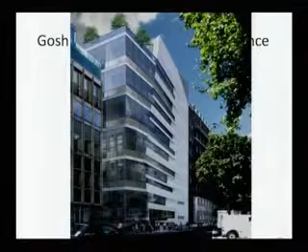This is one of our projects, the extension to the Great Ormond Street Hospital in London. It's under construction now and will be finished by the end of this year, and has a flue wall in the corner there. Oh, you can't see the words, but it's rated BREEAM 77%.

Now, does that make it a green building? The highest you can get in BREEAM in the UK is 85 points. So with 8 more points, it would become the greenest hospital in the UK, or the greenest building in the UK. At the moment, at 77 points, it is the greenest hospital. So I believe we need to go beyond this—beyond accreditation, and beyond engineering.

I'm going to present a number of ideas today about green design. The first one is the idea of vertical urbanism. Most skyscrapers today are like this image you see on the screen—a stack of concrete plates homogeneously one on top of each other.

Now, why does a tall building have to be like this? Somewhere along the line, some engineer said yes, it'd be easier to stack everything together, have the same floor plate design, and extend it, extrude it all the way up to the sky.

Of course, the same architect, if asked to design a medium-rise or low-rise building, would do something like this—he would have atriums inside, he would have programs inserted into it. So why can't we design a tall building in the same way we design low-rise and medium-rise buildings?

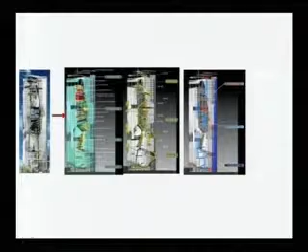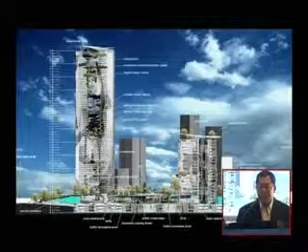That's how we should design our tall buildings: the vertical expression of horizontal desires. So I started to design the skyscraper with different programs in it, with paths in the sky, with various alternative circulation systems. Instead of just one central system, there may be several multiple, so we try to create a city in the sky rather than just a homogeneous stack of plates. This is one of my recent projects in Germany for a vertical city in which the buildings are stacked together in a series of programs in the sky.

So there you are. You have multiple programs, multiple circulation systems. In the last diagram, I indicate that you could even have larger distances between floor to floor, so you can insert secondary floors into it and tertiary floors into it.

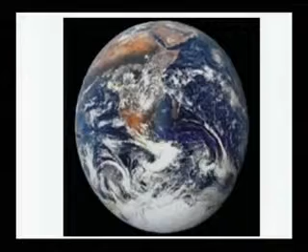The next is the idea of ecological nexus. In nature, everything is connected. It's us human beings that fragment nature. We chop up nature into pieces. We cut, we convert pieces of land by laying out roads and bridges, and we convert the cow into a burger.

The ecologist sees the Earth as covered by this thin film called the biosphere, where living organisms live. Within this biosphere are units in nature called ecological systems. Ecological systems consist of both biotic components as well as abiotic components to make a whole. However, what we've done is design all our buildings synthetically.

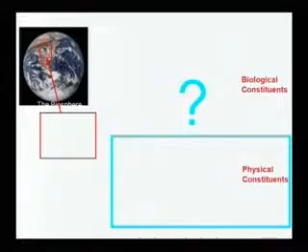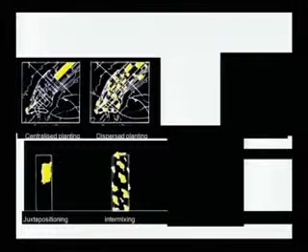If you look at the building like we are in right now, everything in this building is inorganic except human and the bugs. So what we need to do is try and bring back vegetation into nature, into the built environment. Obviously the simplest way is to have sky courts, as you can see in the diagram on the left, or you can have a spotty relationship, as you can see in the one in the middle.

But ideally what you want to do is connect it, because without this connectivity, nature is fragmented, nature is chopped up. So those of you who put sky courts in your buildings, make sure they're connected to the ground, because this is what ecology is about - if it's not connected, then you've quarantined nature.

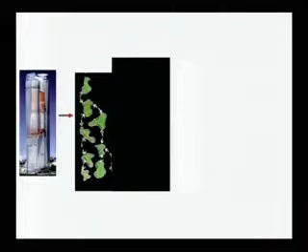So what you want to do is create ecological corridors, or a spiral relationship all the way up to the sky. Of course, there are species in nature that can move from one piece of ground to another, a patch of green to another patch of green, without being connected - species such as birds, insects, and butterflies. But ideally, we need to connect them, make it continuous all the way up to the top of the building.

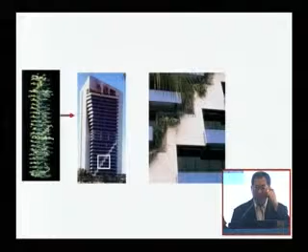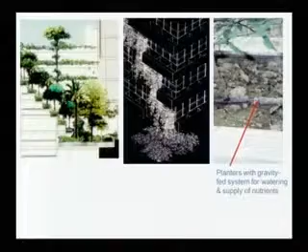This is one of my early projects, a tower for IBM, where here we have a series of step planters going all the way up. The planters have a trellis in between, and this enables continuous vegetation going up to the top of the building.

Another project is this tower, a 40-story tower in Kuala Lumpur, and here we have vegetation on the outside which gives it what I call an indeterminate look. I love this image because this is, for me, what a green architect should be. Green architecture should not look pristine, should not look modernist. It should be like this, it should be fuzzy. And when this was completed, my friends called it the hairiest building in Southeast Asia.

So what we need to do is have this continuous vegetation. This is a scheme that we designed in a cold climate, and the continuous vegetation in the cold climate has to be inside the building. So what we have is an atrium inside, and then the vegetation climbs up to the top of the building.

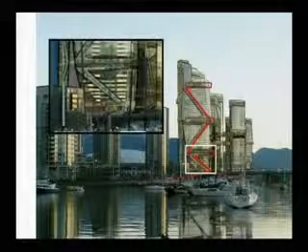Where it hits the edges, it goes into a sky court, also linked by a sky bridge to the upper part of the building. The atriums are recessed into the facade, and they are enclosed to protect the vegetation during the winter months.

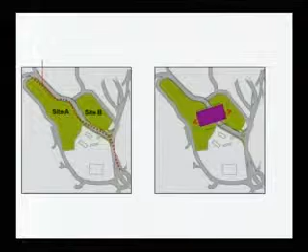The next idea is to see the skyscraper in this way - what I call the eco bridge. Now, if you have two sites which are separated by a nasty highway in between, what happens if you bridge across it? What happens if you vegetate the bridge? Then instantaneously you have created a connected ecosystem.

In which the species are able to migrate from one part of the site to the other part of the site. They're able to interact with each other. It creates a larger habitat with a greater volume of resources for sharing between the species, and then generates a higher level of biodiversity, and being more biodiverse, it is much more stable.

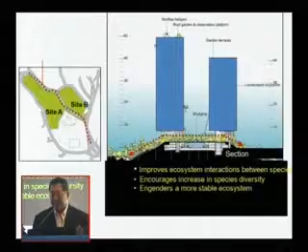With this scheme that we designed, we not only connected the vegetation on the ground plane this way, we brought it across the hinterland through this ecological bridge. So what we've done as human beings is rectify the roads that we built which cut up the landscape—it's now connected, giving us a greater ecological whole.

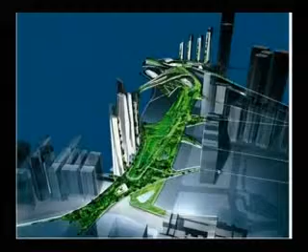The next idea is what I call the eco-cell. That means our connection is not just vertically, but also going down to the ground. This is the master plan for a site where we extended from one part of the site and brought it by a bridge down to the other side.

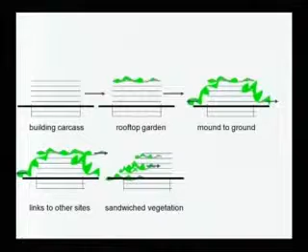Within this master plan, in the podium, the first thing we did was roof the top of the building, bringing the vegetation and biotic components down to the ground to connect to the landscape, tucking it into the floor. But not only that—we cut voids in it so we could bring vegetation, daylight, and sunlight into the bottom of the building. These are where the eco-cells are.

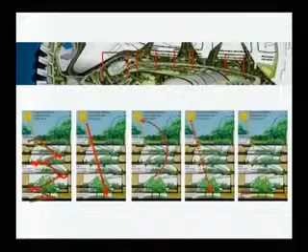Within this eco-cell, you can see it provides opportunities to bring vegetation all the way down to the ground, opportunities to bring daylight to the inner parts of the building, opportunities for natural ventilation, and at the bottom you could have a detention pond, or even a living machine if you wanted to.

Here's an example of an eco-cell we designed in Singapore, viewed from the ground plane—eco-cells on the left-hand side—and this is the view at the basement level. It brings daylight and vegetation into the space. That's the National Library in Singapore, completed a few years ago. In Singapore everything is high-rise, so this is a high-rise library, 120 meters high.

The other idea then is to see the building—oh dear, the slides, the background's gone. Is it? Can you see it? Okay, I hope you can read it.

The idea is to see green design as the integration of four eco-infrastructures: the gray, the blue, the red, and the green. I color-coded it because it makes it easier to communicate the idea of what green architecture and green master planning should be. The gray is eco-engineering.

I specifically kept it general—I didn't want to mention particular technology—but essentially all green architecture has engineering, whether we like it or not. Our quality of life requires engineering to handle all the different aspects of our lifestyles. So all green architecture has this gray infrastructure, which is eco-engineering or clean technology.

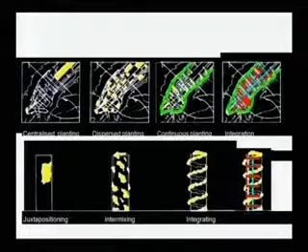Green architecture is the integration of these four infrastructures into a whole. If you take this as a framework for evaluating green design projects, some of the famous eco-cities in the world, such as Dongtan or Masdar, have very clever engineering systems. Some endeavor to close the water loop with a blue infrastructure, and some have new lifestyle systems and new rules and regulations. But all of them haven't got this continuous green infrastructure. Without nature's utilities, without this green infrastructure, it is not an eco-city, it is just a chunk of engineering. So what you need to do is not just integrate the biomass, the biotic components into the built environment, but we've got to have these four basic infrastructures: the green, the blue, the red, and the gray.

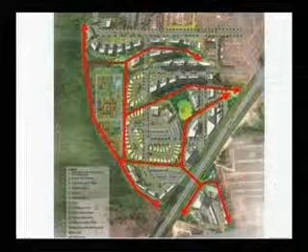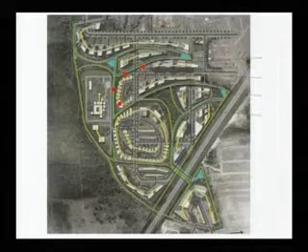There's a scheme master plan that we did in Bangalore, on a piece of site next to a forested land. What we've done is collected all the vegetation on the bottom left-hand side of the site, on the southwest, right along the forested area, and then stretched it across the site the same way you would stretch a piece of chewing gum, and that becomes our green infrastructure. Then this is the blue water infrastructure - we have a series of retention ponds which bring the water back into the ground.

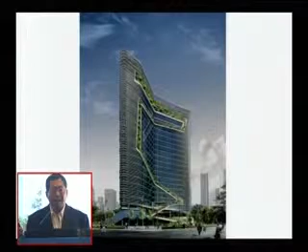Now, what I try to do is, if we can have these four infrastructures in the master plan, what happens if we flip it vertically in the same way I mentioned earlier on? In this scheme that we designed in Gurgaon, near Delhi, we created this green infrastructure on the building that starts from the ground, weaves its way up to the top of the building, and goes down the other side. So that's the eco infrastructure in the high rise.

Green design isn't just about designing a building. All of us design a building and think we've done our bit, but actually that building sits in a context, sits in the regional context, and we have to see our responsibility as ecological designers - not to see buildings in isolation, like an island, but in its regional context.

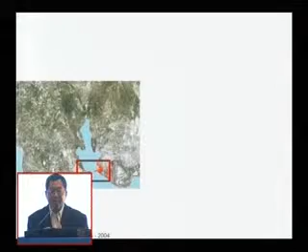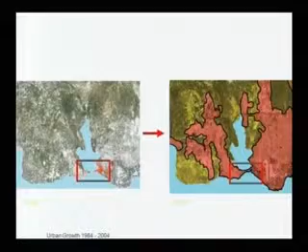This is a scheme that we designed in Istanbul, and you can see the site is on that left-hand side. What we as human beings have done is eaten into the landscape. Over a period of 20 years, you can see that we have actually eaten the landscape, going all the way up to the top of the site, all the way down to the waterfront, the other waterfront. In our scheme, we said let's reconnect nature, because human beings have fragmented it, and we propose that we should reconnect it and make nature whole again, recreating this ecological system.

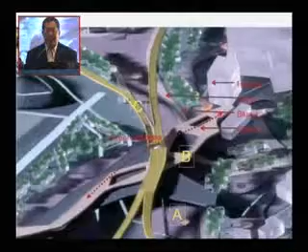So how do we do this? Because there are existing roads, existing highways, existing developments, in the same way as in Mumbai. The idea we had was to try and use the ecological bridge again, to bridge across green areas, to try and reconnect the city and make the city whole. Here's the model of the scheme, and the red squares show where the ecological bridges are. In this way, we made that part of Istanbul a completed ecosystem, which is connected and made whole again.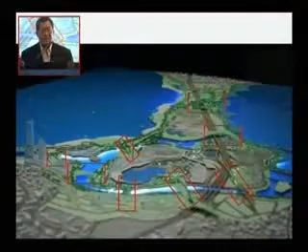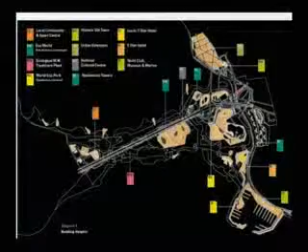To make it justifiable, to make it commercially viable, we started to develop programs for this green space and made it the single largest park that Istanbul can have. This is the various land uses for the site. This is the water infrastructure. This is the green infrastructure. That's the water system. That's the gray infrastructure of the roads and utilities. And that's part of the infrastructure. So in that way, we make Istanbul whole again as an ecological system.

So what I presented today are some of the ideas. I don't want to give all of it away to you - I've still got a few more. But these are some of my thoughts about how we could push the green eco-skyscraper to the next level, beyond eco-engineering and beyond accreditation systems.